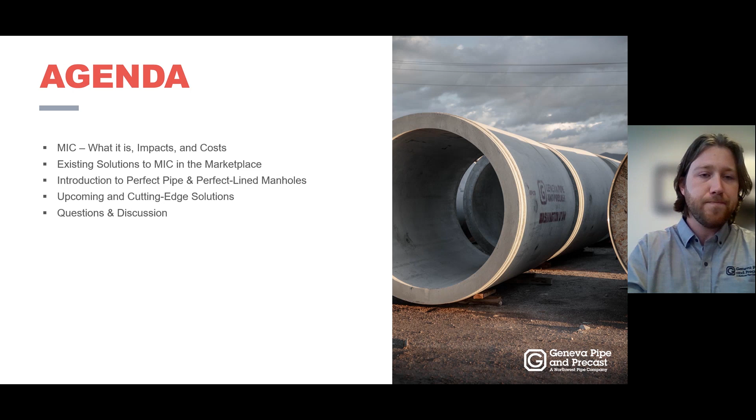So jumping into it now, microbiologically influenced corrosion, also known as MIC, is a major problem in sanitary sewer systems where precast or cast-in-place concrete exists. Usually it flies under the radar, considering that most of this occurs underground, out of sight, in the dark. And so it's a natural reaction of chemical processes.

To a group of employees of a wastewater agency. And in this presentation, which was much like this one, I asked, have you seen any of this corrosion occurring in your system? And they said, no, not at all, regardless of their system being over 80% concrete pipe. Following that meeting, we walked to a manhole that was less than 200 feet away from the meeting room where we had that presentation, and we popped this manhole cover.

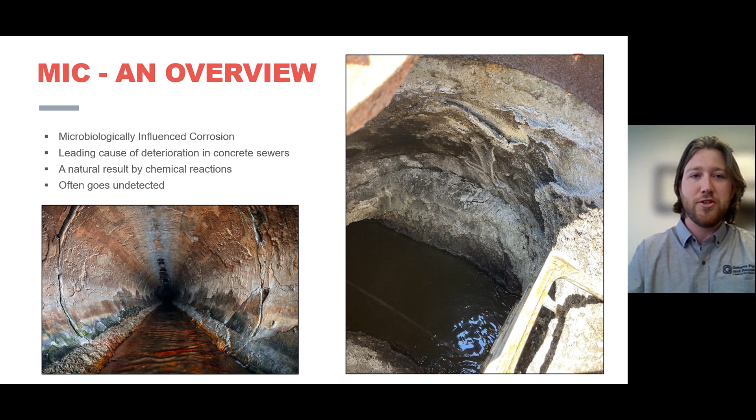Whereas you can see the concrete is peeling away from the walls, this is very much a problem in our area and in our industry, as shown in that one experience.

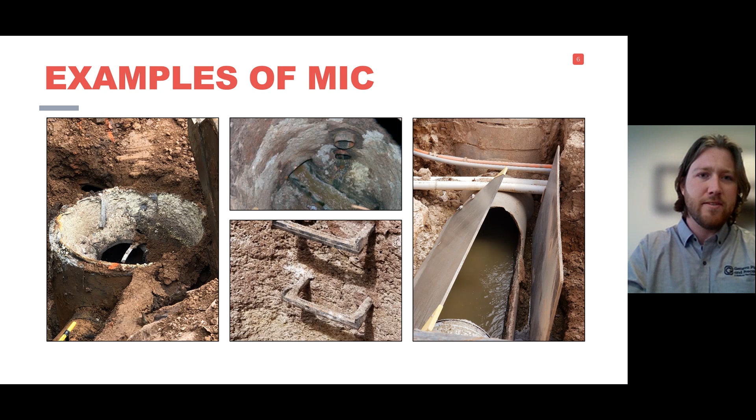So a little bit about the how of MIC, and how does this happen? Where does this corrosion come from? As wastewater is conveyed, there's obviously organic and biological matter that continues to break down as it's transmitted through the system. As this happens, the chemical reactions related to this degradation create H2S, or hydrogen sulfide. As various factors affect the water, it will produce an airborne version of this gas, which will then eat away at the concrete.

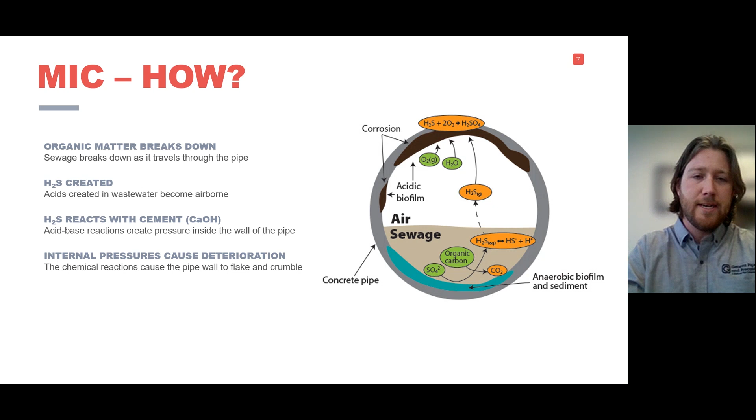It will react with the chemicals inherent to concrete pipe or concrete precast structures, and with expansive internal reactions happening layer by layer, the concrete can slough off and fade away, leaving a shell of what once was, or just failing infrastructure in general.

So there are various factors that increase the likelihood of MIC affecting a specific pipe or structure. First of all, heat is a major factor, so in the southern parts of the US there's a higher likelihood of MIC being a major problem. Turbulence is another, for example lift stations, drop manholes, even steep changes of grade across a manhole.

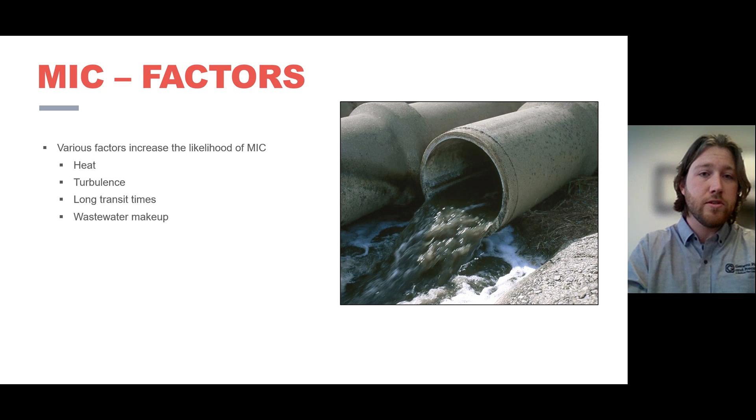Long transit time - the longer that wastewater has to move down the pipe and that matter has to break down, the more acid you're going to see. And finally, wastewater makeup. One example: we had a customer ordering pipe for a dairy, and the temperature of the water combined with the components of the wastewater meant they were eating through concrete pipe very quickly, so they needed alternative solutions to maintain their infrastructure.

Though it might not seem apparent, there are many impacts of what MIC does to us. The first, which we've already talked about a little, is infrastructure reliability - you can have pipes collapsing, manholes failing, and if a manhole's failing, you've got increased I&I.

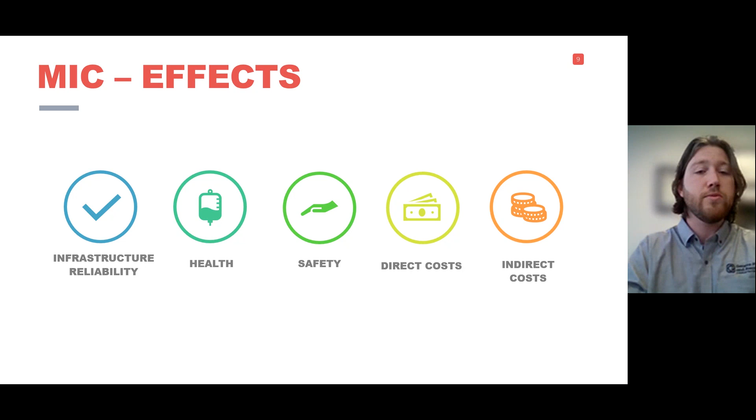You've got the possibility of sinkholes. There's public health concerns, because if your wastewater is leaking into the groundwater, there's obvious impacts there. Safety, direct costs, and indirect costs, which we will talk more about as we move on.

These costs are not insignificant, and we'll talk more about this in just a moment following a poll question. But these include, as I said, infiltration and inflow, the increase in water that needs to be treated, or even worse, exfiltration as it leaks into the soil, rehab, replacement, reduced service life, and finally risk of collapse.

And as you can see from that quote there, it has been one of the most serious and costly problems facing global sewer systems. It is a major problem that we are facing as an industry.

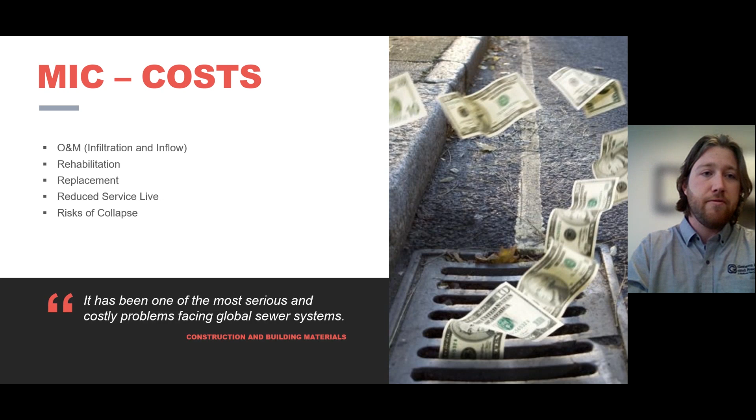So, like I mentioned, here's our first quiz question. Once we get that launched, you should see a quiz pop up in the middle of your screen. Let that load, and here's the first question: how much money would you guess is spent on rehab and replacement each year? You have your options there to go ahead and vote, and once we have a significant number of votes in, we'll take a look at the results.

Alright, so it looks like we have 23 attendees at the moment, and we've got 13 responses. I'll give about another 10 seconds for a response.

And again, you're not being judged on this - we're not recording who's voting what. This is more for us to gauge interest in, and gauge knowledge of, this problem and these solutions in our industry. So with that, it looks like the majority of people voted D, 14 billion, followed by 6 billion and 10 billion. The lowest option was 4 billion dollars, and that is still a massively significant number, considering how much good that money could be doing if this wasn't a problem facing our industry - instead of just replacing products, it could go toward greater service life, greater condition, and so on.

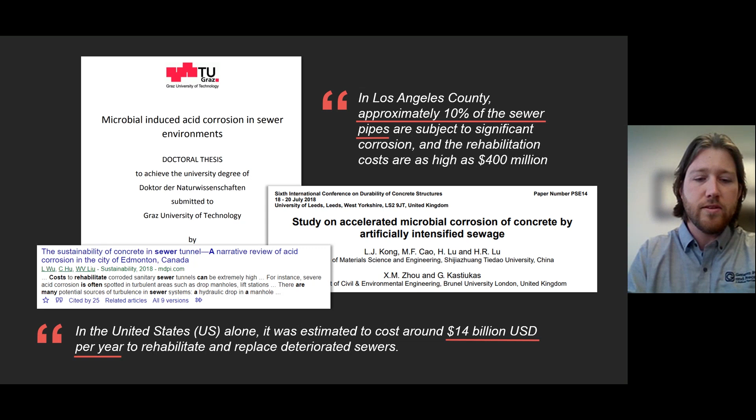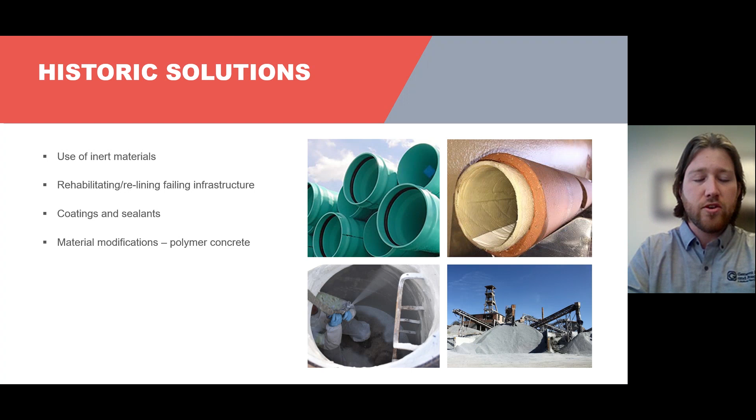If it's been such a shocking, massive, widespread problem, and it's not new or catching anybody by surprise, there have been attempts for quite a while to remedy this. Historically, there have been several options: the first and most common today is the use of inert materials. Second, and far less ideal, is the rehabilitation of failing infrastructure through relining or various other options. Another would be coatings and sealants. And finally, modifying concrete makeup and batch mixes to create a modified or improved solution to a product that is well trusted and has a great reputation in our industry.

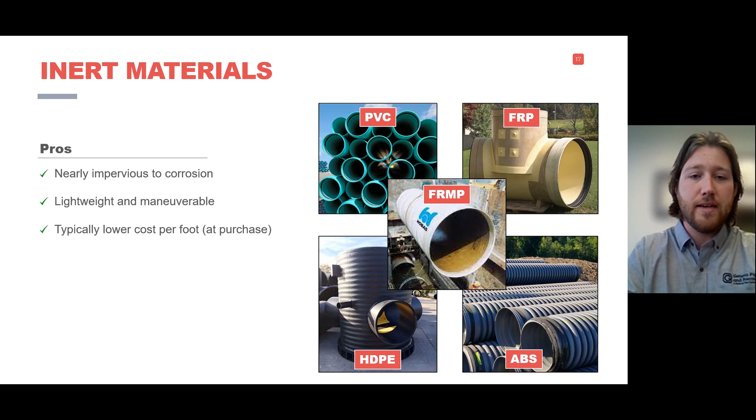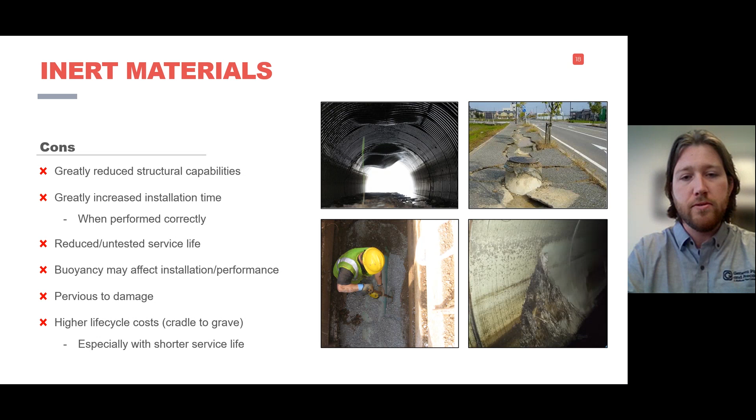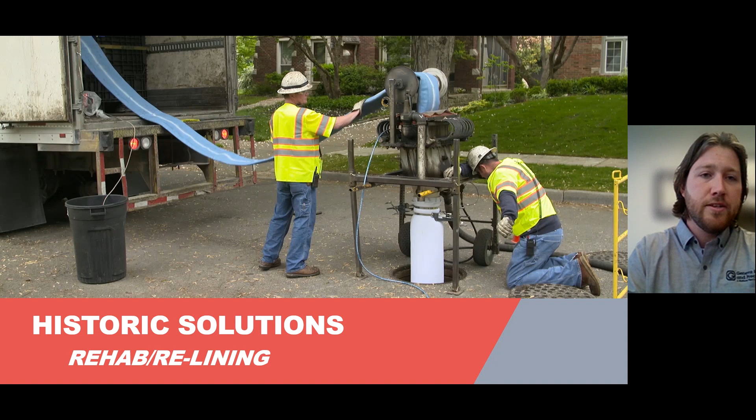The next one, which we're covering briefly, is rehab and relining, which most people in attendance today seem to consider the preferred solution. There are pros and cons. The number one pro is that there's no replacement necessary, which saves time and money, and it's less disruptive.

Finally, one thing I found interesting in my research was that some technology touted as a solution with long-lasting lifespans has not actually existed for its advertised lifespan. So that's something to keep in mind as well.

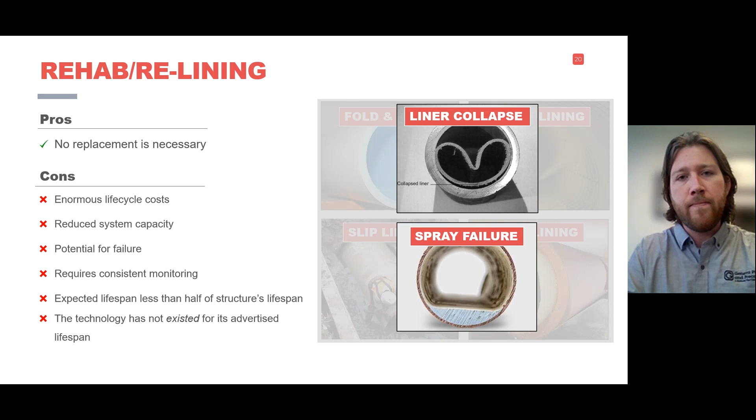Third, we've got coatings and sealants. The pros of these—and I'm not saying these solutions don't have their place—is that these coatings and sealants are designed to protect typically structural materials, precast concrete structures. They can be checked for imperfections, and their thicknesses are adjustable. So if your agency wants greater thickness to ensure corrosion resistance, that's an option, with several options to choose from.

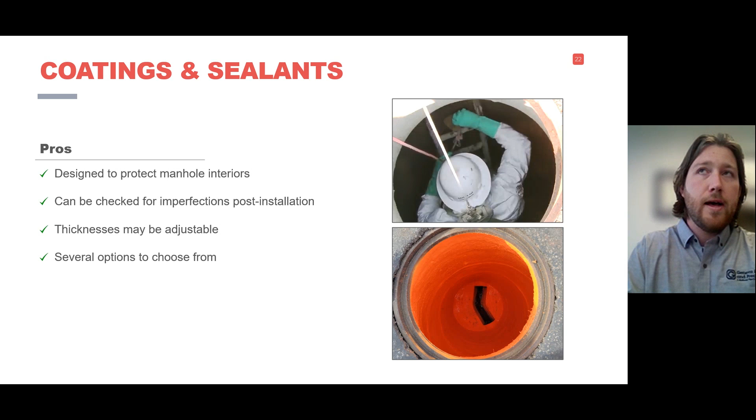But the downside is that this is typically most effective for new installation. As a rehab technique, it's typically not advised without extensive work of sandblasting and cleaning. Because of that, the time and effort involved, in tandem with cost, increases the life cycle cost exponentially.

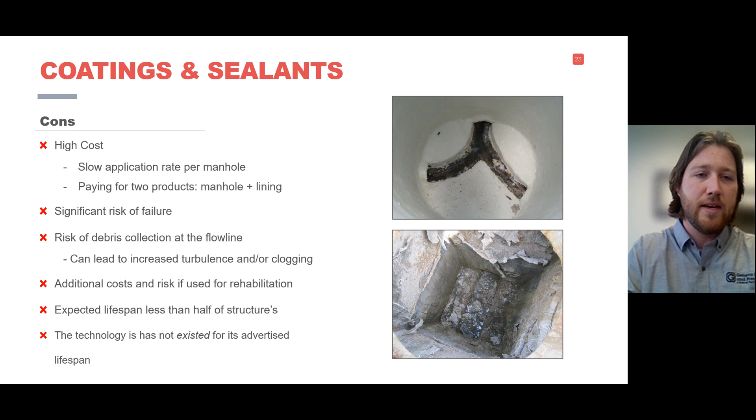It's high cost, it's slow, and there are significant risks of failure and delamination. There are some pretty bad horror stories about things just falling apart, because an agency sealed it and thought they were good to go—they didn't check back. When they did, major damage had taken hold once the liner had started to fail.

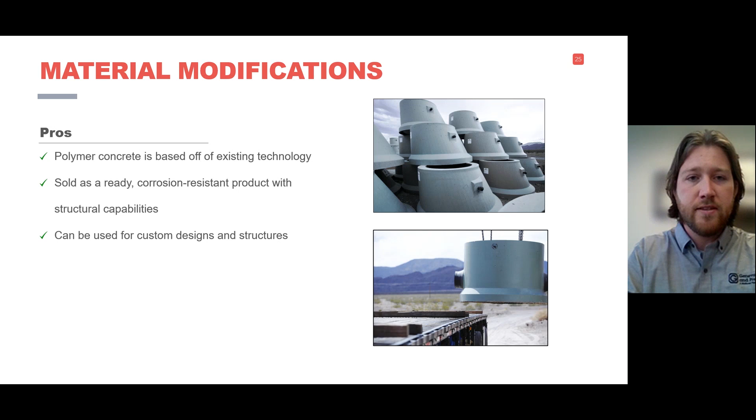Finally, we've got material modifications, typically in the form of polymer concrete. The pros of this are that it's based off existing technology—concrete, precast concrete structures, and things of that nature. It's sold as a ready, corrosion-resistant product, drop in place, typically with the same installation procedures as standard concrete precast structures, and can be used for custom designs, vaults, or things of that nature.

The downside is that it's typically not designed with reinforcement, and additional admixtures and modifications make these materials brittle or subject to various other problems that unmodified concrete doesn't see. There are, based on the minimum thicknesses when using reinforcement, typically not as fragile structures as you see with polymer concrete, just based on standard thicknesses and compressive strengths.

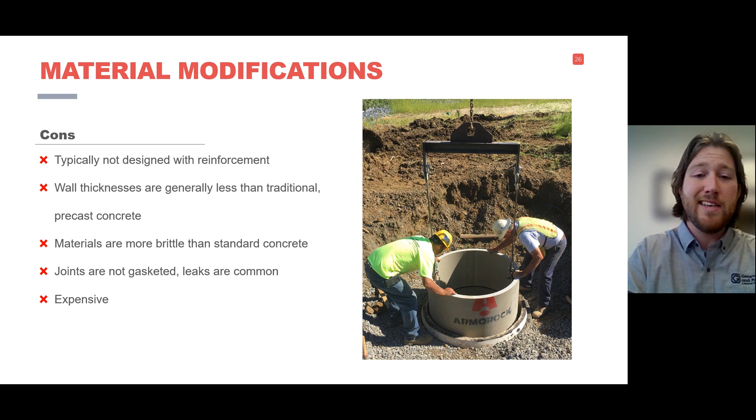Finally, because these joints are not gasketed, leaks are common. So while you might think you're protecting groundwater or things like that, you could actually very well be experiencing exfiltration unknowingly. Finally, it is a pretty expensive option.

So let's get into what could be a perfect solution. The best parts of several of the options we've discussed are that inert materials are inert, and their weaknesses are in their structural capabilities. There was a plan many years ago to develop a hybrid of sorts—a lined concrete pipe—which both prevented the concrete from experiencing corrosion associated with hydrogen sulfide gas, while also providing the strength and structure of concrete pipe as trusted.

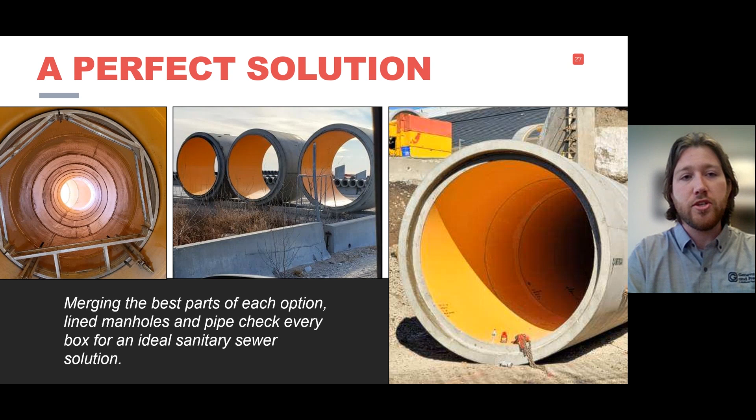So back in about the 1980s, this product entered the market, but there were downsides to it because it required in-field welding, manual entry and access. It was slow, time-consuming, expensive, and absolutely infeasible at smaller diameters, which kind of led us into the product we would like to introduce to you today.

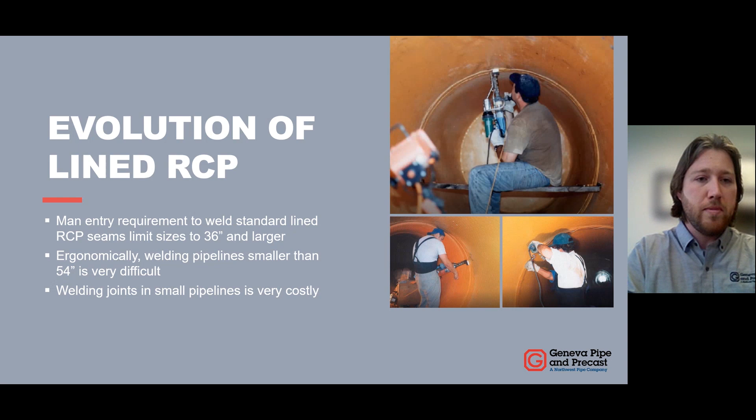And I'm going to be introducing our products, talking a little bit more about the application, how we make it, and the quality of the product.

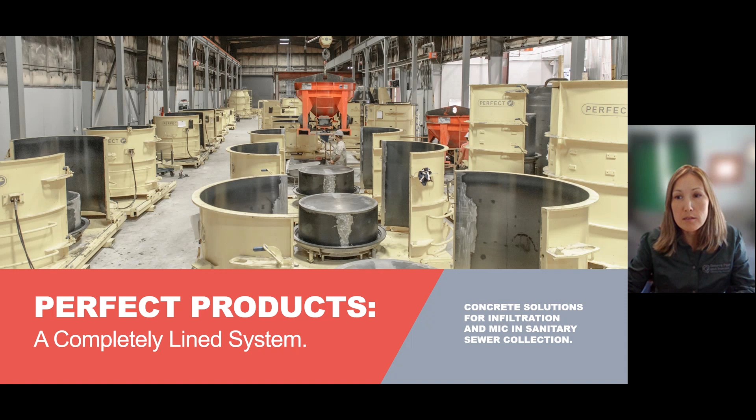So this picture that you're seeing here is a photo of our perfect plants. As you can see, we have various sizes on site that we use to make our lined products, and I'm talking about both lined manholes and lined pipes.

So the entire Perfect Lined system consists of a Perfect Pipe and Perfect Lined manhole. The Perfect Pipe is basically your traditional ASTM C76 RCP, but it's also lined, and it also has innovative connectors that we haven't seen in the US market before. Geneva Pipe was part of the solution and brought this technology over to the US.

The availability of these pipes is anywhere from 24-inch all the way to 120-inch, dictated by the availability of the manufacturing equipment. The pipes are a little bit longer than traditional storm pipes, about 10 feet long. As you get closer to the manhole and need to adjust the length, instead of cutting it in the field, we can manufacture shorter sections so you don't have to cut, and you can still reuse this coupler.

You can see the black coupler on the screen, so you can seamlessly connect pipe to the manhole. These pipes work not just with Perfect Lined manholes, but can connect to any existing or new manhole in the field using the connectors. If somebody's manufacturing a manhole, we would provide the connectors so they can cast them into the manhole, so our Perfect Lined pipe can connect to that manhole.

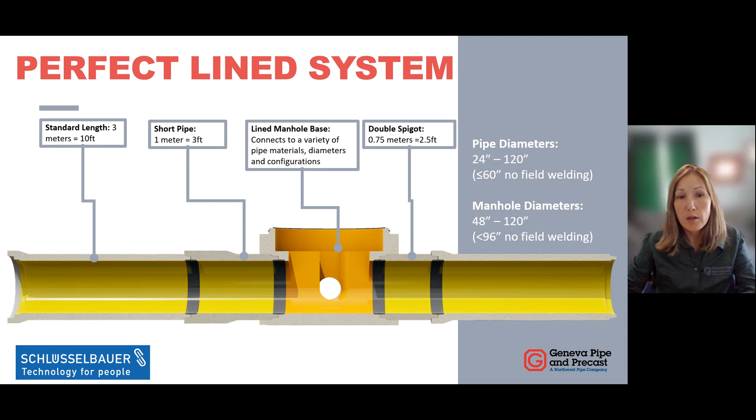Let's look at the anatomy of the Perfect Pipe. It consists of the traditional ASTM C76 RCP plus an embedded liner, showing monolithic or composite action. So it has the strength of the pipe and the corrosion resistance of the HDPE liner, one of the top materials for corrosion resistance, and it's also abrasion resistant.

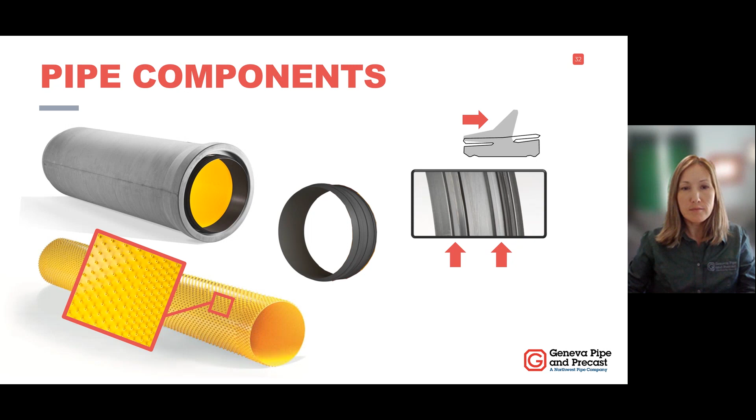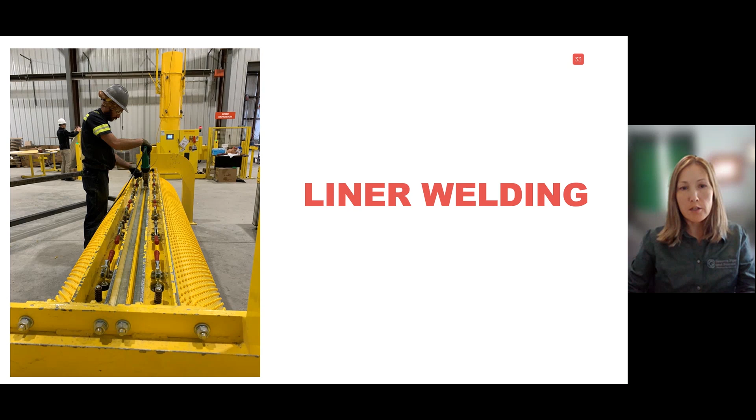Here's a photo of our facility. Each liner goes through the welding with a gun, and then each weld, before we put it into the form to pour with concrete, is tested for any defects. And at that point, no liner would go into casting without being checked. So we have a very tedious process of quality control for our pipes, including the measurements of the liner and the weld checking. And after that, it gets cast into concrete.

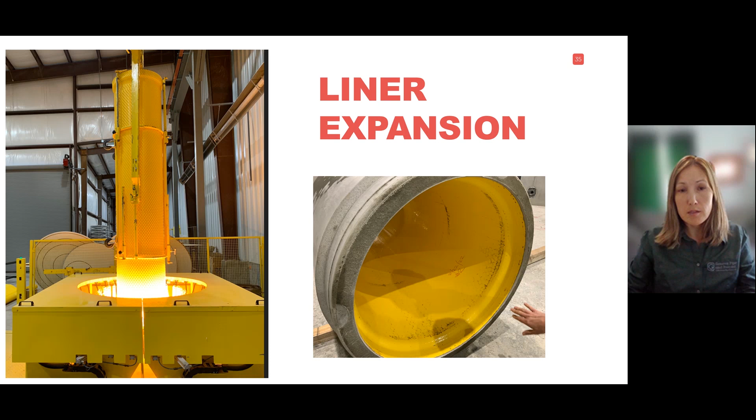So this is the photo of the guy testing the liner. Then the liner goes on the expansion machine. It heats up the liner and expands the ends of the bell and the spigot. So this is the recess point where your black coupler would go as a part of the joint. So for these pipes, you don't really need to do any welding when you install. So that saves on time and installation cost for the agency, for the contractor.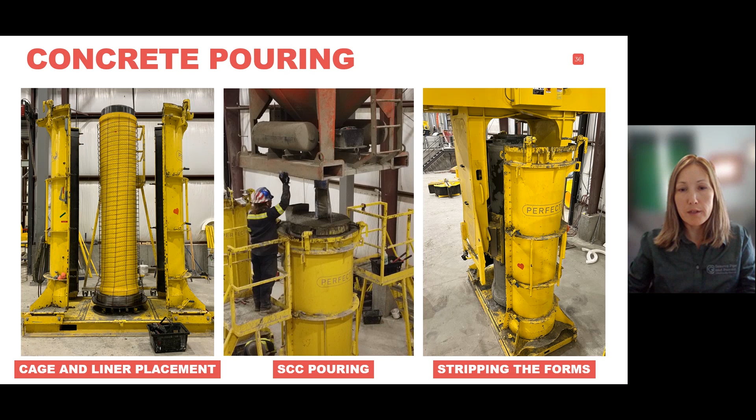And here are the images of how we prepare the liner and the cage right before it's being poured. On the left-hand side, right over the liner, we'll put the reinforcements. And once the reinforcement is in, we do the quality checks to make sure reinforcement is in place, it covers all the joints, and spacing is correct. So then we close it off and pour concrete. And the next day we strip the pipe and do the quality checks to measure everything else that is needed.

So the major benefits: you're getting the strength and structure of concrete, right? And everybody's familiar. The expected service life of concrete is over 100 years. Plus, now the concrete is chemically resistant because of the liner embedded into concrete. Then superior joint performance. The major concern with the agencies in the past related to RCP is the joints. Joints don't perform, they leak, they move. So this pipe resolves all the issues that regular RCP has for leaking or having to weld the HDPE liner.

It is familiar to the contractors. Contractors may have never seen the perfect pipe. However, they've seen RCP, and this pipe is installed just like RCP because it is RCP. And the major advantage of these pipes, it eliminates the field welding for most diameters, right? So if you have a pipe of 24 or 36, even 42 inches, it's really difficult for a human to go in the pipe and access and weld. So the contractor will have to have somebody tiny and experienced. But with these pipes, you don't need to go inside the pipe, and it also eliminates the risk associated with confined spaces. So it's a huge advantage in cost and time and risks of installation.

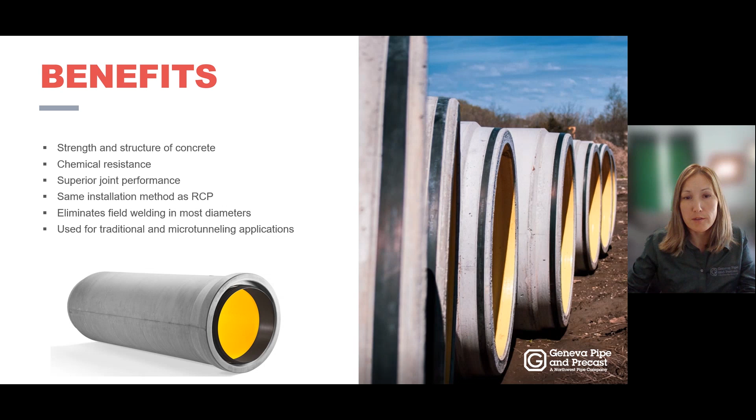Now let's talk about perfect line manholes. So these are the photos of the perfect line manhole and the form that the perfect line manhole is made with. So the background: this technology was developed again in Europe by a guy called Manfred Predl. He's in Germany. And these manholes spread like fire in Europe. They've gotten adopted by the agencies because the agencies saw the value, and they started replacing all the older manholes with lined bases, lined risers, basically perfect line manholes. Over 200,000 lined bases have been installed in North America alone. I'm counting Canada and US.

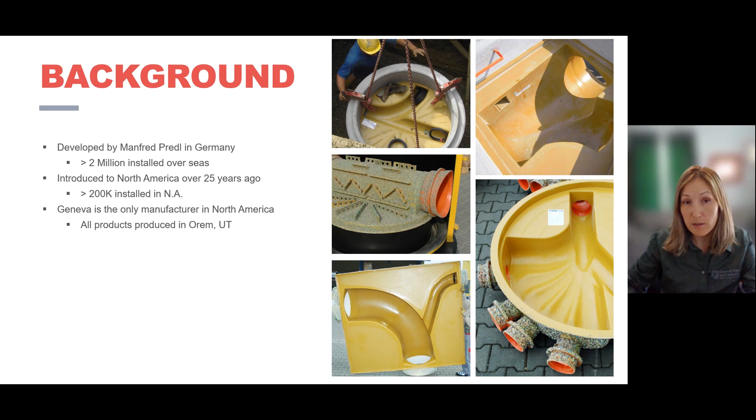And Geneva is the only manufacturer at the moment that produces perfect line manholes. That means the full solution: the bases lined, the risers lined, and the lids lined, and it has seamless joints where you don't have to weld the liner between the sections. It has a gasketed joint, and the manhole has been pressure tested to make sure it is leak proof. So here's a breakdown of all the benefits of the perfect line manhole. We also have a warranty of 50 years against corrosion in these structures.

So as you can see, the base is lined, but it's lined with FRP, or fiber reinforced polymer. It is not easy to line the complex configuration of the base because you have all these turns and troughs and channels, and so we line it with FRP. And then we have risers that are lined with HDPE. You saw in the previous picture when I was talking about the pipe, it's lined with a perfect liner, HDPE liner. We have lots of anchors in it. It's also embedded into the walls of the manholes.

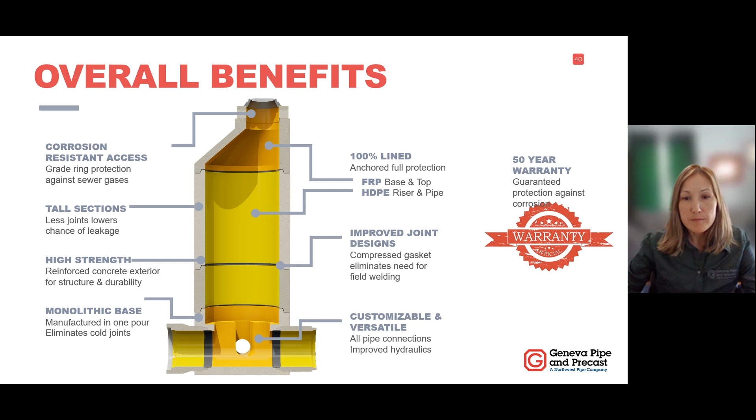So the manhole joints have a compression rubber gasket seal. So when the contractor puts the gasket on and puts the next section on, it compresses and distributes the load of the section evenly, so you have a nice tight seal in that manhole. This manhole is also cast monolithically, so you're not going to have any cracking in between the walls and the bottom slab. And it's cast with a self-consolidating concrete.

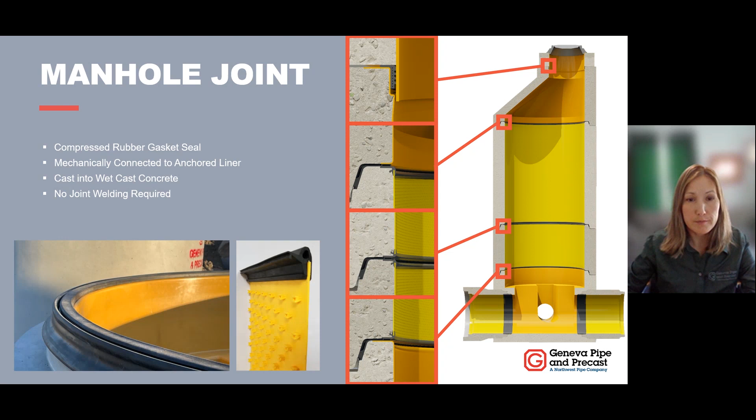And again, the huge advantage is that no welding is required, so you don't need to have anybody inside when you install these structures. You just put the sections like a regular manhole and you'll be done. Again, the same liner as we use for perfect pipe. It's a highly abrasion resistant liner. We have it in different thicknesses. Our perfect line manholes are manufactured with a 2 millimeter thickness. However, if you require higher back pressure, for example a deep installation with high groundwater, we can manufacture it with a 3 millimeter or thicker liner.

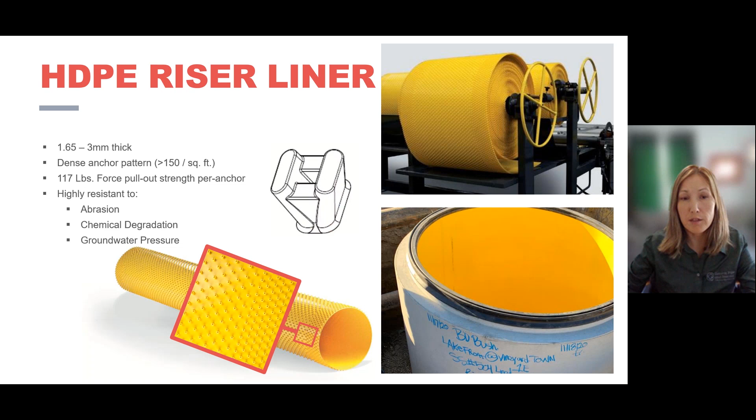Over here, you see how we make the liner. Basically, we make a negative mold of the channel, and then spray it with fiber reinforced polymer or plastic, and then we attach these black little parts. They're called bonding bridges. We attach them to the liner, and then they're going to be cast and hold that liner embedded into concrete. The liner also features built-in connectors for different types of pipe. So if you have specific pipe, let's say SDR35 or DIP, we have specific connectors that can fit that pipe. The photo on the right is one of our first projects, which was made in Utah.

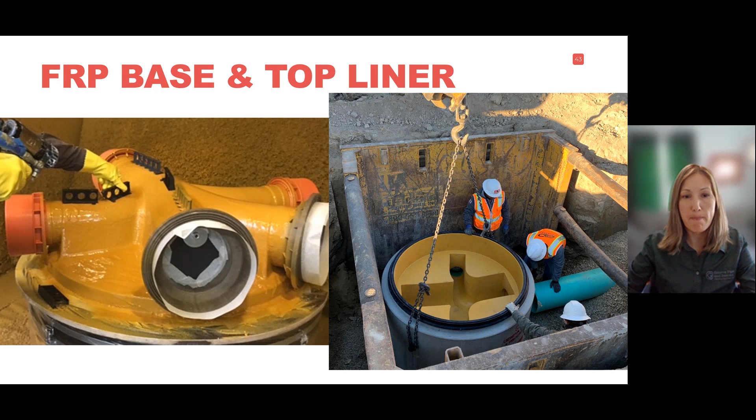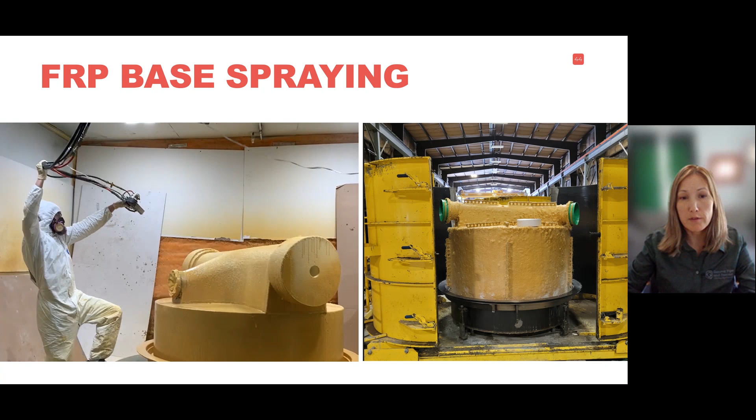So another image showing how we manufacture those liners. Basically we spray the negative mold with the FRP. Once that mold is completed, we place it in a form, then we close it off and pour concrete over. Then we flip it and your base is ready. With these manholes, we can do technically any configuration. We have a robot that cuts the channels or the negative form to any configuration. If you have 3-way, 2-way, 8-inch, 10-inch, we can make it all to whatever your imagination is.

A little bit of testing background. This testing has been done on an existing installation. After 20 years, one of the manholes was dug out. They wanted to see how the liners perform, and if there's any deterioration behind the liner. I don't know if anybody's familiar with T-lock. T-lock used to be one of the popular choices, and it still is, especially in the state of California, where agencies would choose T-lock, and it's a PVC liner. And after some time, 20 years, 35 years, they go back and they do find corrosion behind the liner.

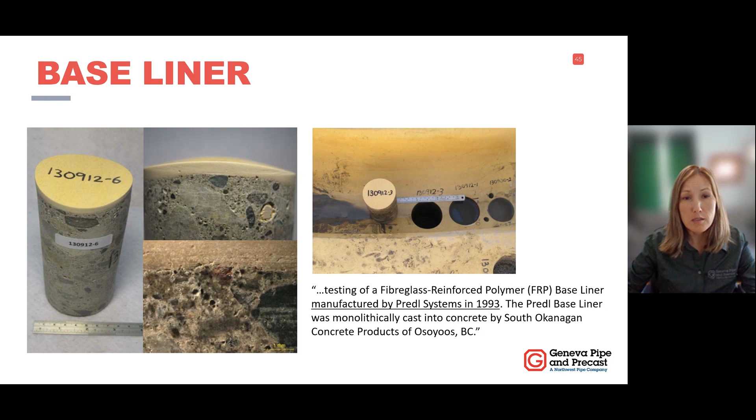The most likely reason is that during the welding, it has not been welded through properly, and you probably had some defects in the welding where your environment could still penetrate through the liner into concrete and create corrosion. But anyway, if you're looking at this cutout, they dug out one of the bases and cored it, and they looked at the thickness before and after, and they did not see any deterioration in the liner, and they did not see any corrosion behind the liner. So this is a great indication that this liner works, and it can seal and protect concrete for years.

And this is to the point where I was saying that we can manufacture any configuration. This is an example of one of the projects that we did last year in Utah, where we had to manufacture a 96-inch lined base. On the left-hand side, this is a liner in the preparation stages, right before being cast. And on the right-hand side, this is the lined base of the manhole. In this case, the agency chose to have only the base lined, but the risers were not lined.

We see that very often. But one thing to remember is that microbial induced corrosion happens in the air, not in the trough zone where you have the flow, but because of the suspended particles from the wastewater. So most likely you're going to have deteriorating walls rather than a deteriorating channel.

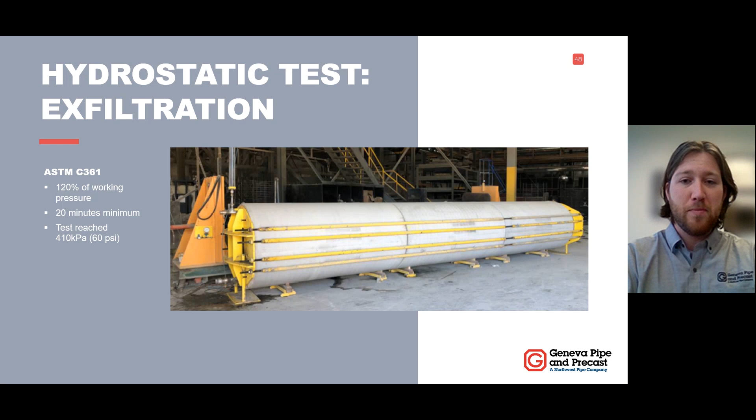Moving on, I wanted to mention some of the tests done for these products. The first was a hydrostatic test for exfiltration. As mentioned earlier, one risk with failing infrastructure is groundwater pollution. If a pipe starts to fail and wastewater gets into the groundwater, there are very serious health concerns. In considering this product that Geneva was willing to put their name and reputation behind, we wanted to make sure these tests would stand up to our industry standards. In this test, we held a positive pressure for 20 minutes at 60 PSI. To be clear, these pipes are not pressure rated, and we are not recommending them for pressure sewer installations. This was simply to see what the product could handle if we get head in a manhole somewhere upstream. It was able to handle 60 PSI, which is a whole lot more head than you'll see in a normal installation or project.

Secondly, we wanted to test for infiltration. Another cost associated with failing infrastructure is the increase of water that needs to be treated. For this test, it's kind of hard to see, but in the right photo we drilled a hole through the bell of one pipe joint and introduced a positive pressure behind the coupler, to test those gaskets and see what they could hold. These held at over 30 PSI for 20 hours, which again is a lot more head than you'll see in most typical installations.

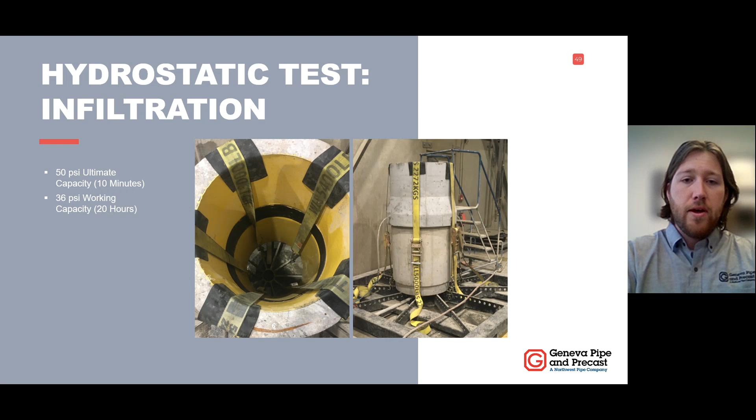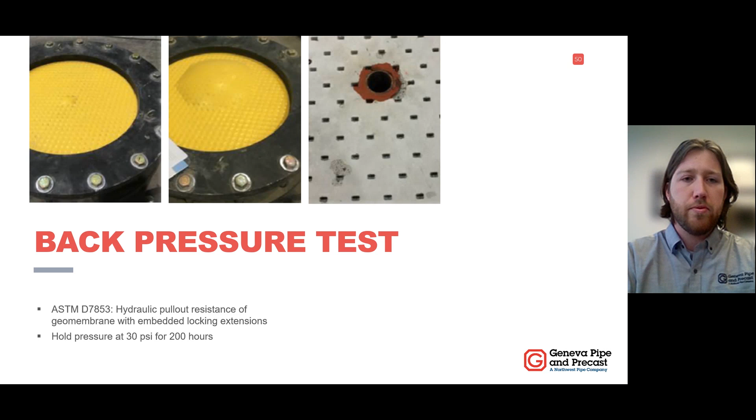Beyond that, we wanted to make sure not just the coupler, but the liner itself, would hold up if water pressure got behind it. I don't remember if Elena specifically mentioned it, but each of those anchors holds, I believe, over 100 pounds of pull-out force per anchor, with over 100 of these little anchors per square foot. So we tested 30 PSI for 200 hours to see how those anchors would perform, and they were able to hold.

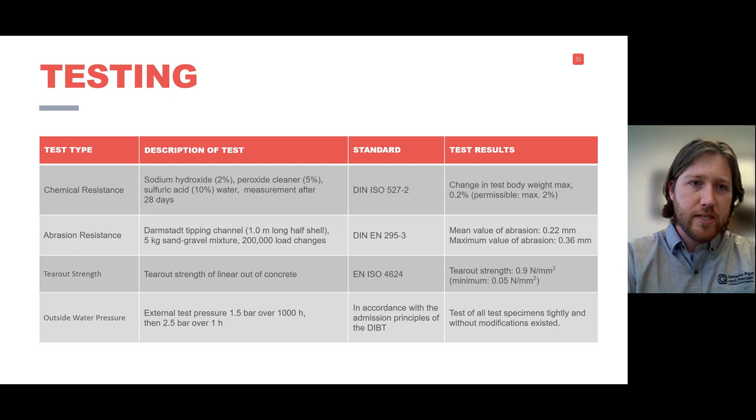As Elena mentioned, this technology was initially developed in Europe, so there have been extensive tests done over decades of service. You don't see ASTM on there for the standards, but these different standard organizations are from the European Committee of Standardization, equivalent to our ASTM standards. They've been tested for chemical resistance, abrasion, tear out strength, outside water pressure, and high pressure jet resistance for when you clean and pressure wash the interior of your system.

Sorry, pipe connection seal, and various other tests.

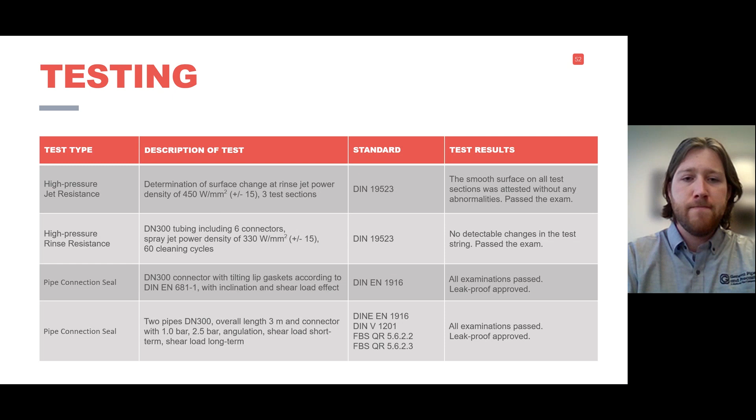Here are some more as well, but let's move on to our final quiz question. If we can launch that. I really wanted to save some time for questions, so I'll try to speed through the rest of my section.

Which of the following is a benefit of perfect pipe and perfect line manholes? Go ahead and submit an answer there, and we'll try to go quick on this one just to save some time.

Alright, we've got 8 responses right now. We still have 30 attendees, so we'll wait a second to get a few more. I like what I'm seeing, a lot of people are getting this question right. I've had more success on this one than some of the others, so good job reading through those options.

Yes, if you haven't already voted, the answer is E, all of the above. All of these various features and benefits of this product line are real and can help prevent your infrastructure from failing prematurely. Thanks for voting for that.

I wanted to highlight just really quickly a couple of projects that we've done in the last year here in Utah, where we're based out of. This one was the 950 North Sewer Trunk Line for a sewer district here in Utah. This one was interesting. There was a major transportation corridor coming in, and the service district knew that if they were to put this pipe in ahead of time, it'd be a lot cheaper to put that in before the highway went in. But they also recognized that if that pipe was ever to fail, it would be enormously expensive to replace or repair or whatever they would need to do.

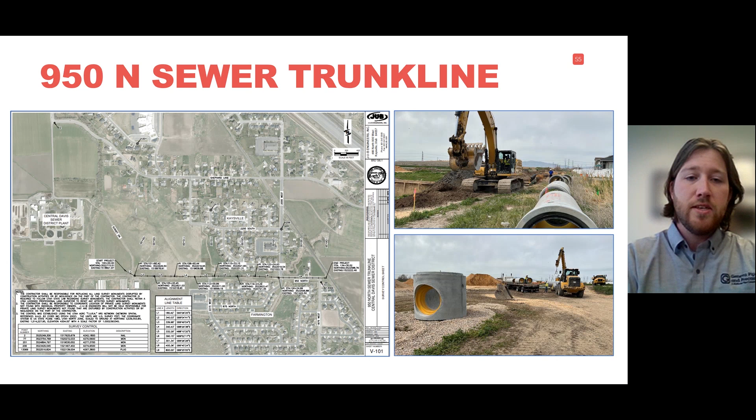The project was bid with 4 different pipe materials: PVC, HDPE lined RCP or perfect pipe, non-lined RCP, and FRP SN72, which some of you may be familiar with. The reason the perfect pipe was chosen for this project was, one, due to its durability. There were great installation depths, over 20 feet, but the real reason why they were so impressed with this product was because of the high groundwater. At that depth, there was groundwater almost to the surface, and they needed something that would be able to resist the infiltration and inflow. So they went with this product for over 3,400 linear feet of sewer pipe.

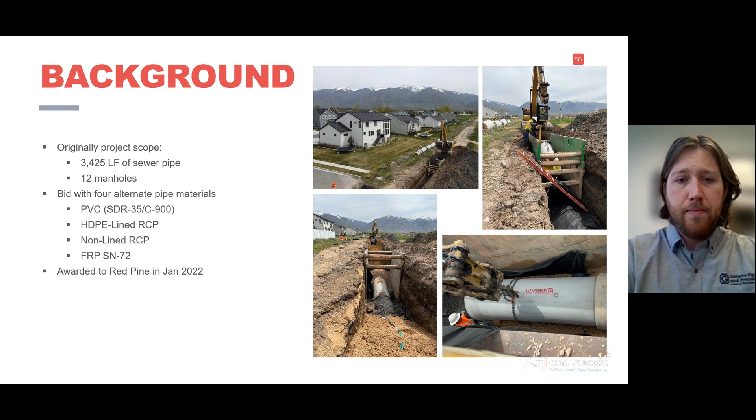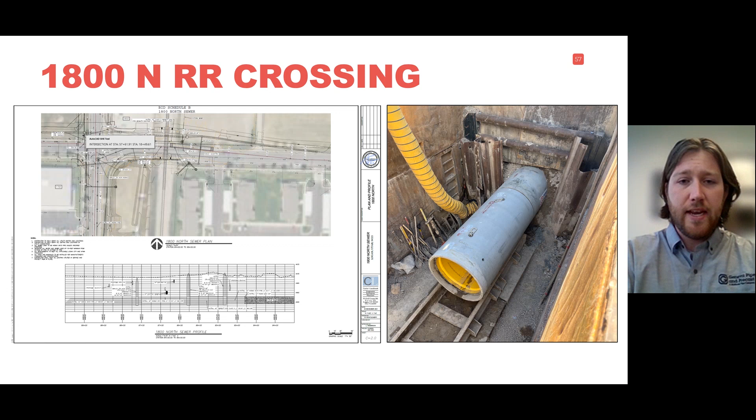The next one I'll briefly cover was a jacking job that we did for the city of Logan that went under UPRR right-of-way. That one was particularly interesting because, as some of you may know, typically if you were going to be crossing railroad right-of-way, you need a casing pipe and then a carrier pipe. For this product, it was approved as an all-in-one solution as both carrier and casing for sewer, which is very unusual. Typically, I'm not aware of any other projects like that, so this was an exciting one for us to do. The background was there's just over 100 feet of sewer pipe from one edge of the right-of-way to the other because the railroad wanted something that would be corrosion resistant and durable.

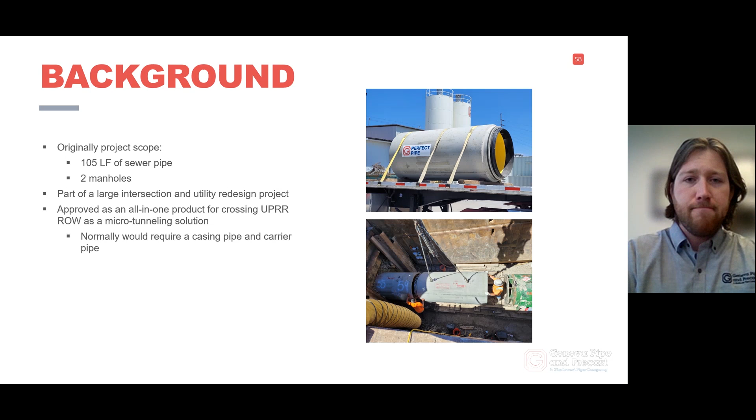A couple of manholes that Elena showed previously. Finally, the benefits of this as a trenchless installation are that, again, you have minimal disruption. You're not tearing up the road. To tear up a railroad crossing would be incredibly problematic and expensive and time consuming, and in reality probably just would never be approved. So this solution was very exciting for us.

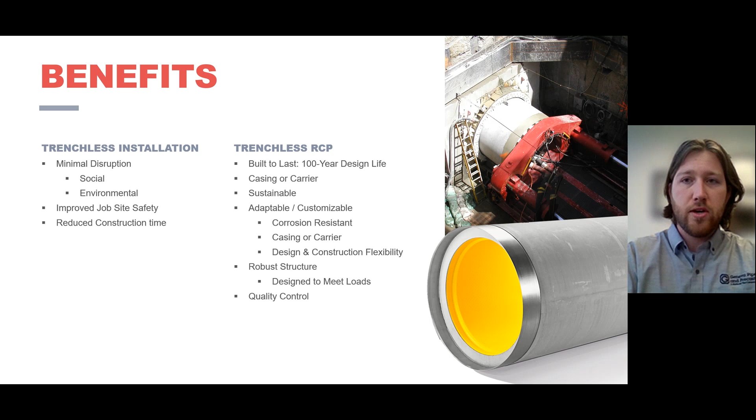I just wanted to briefly tell you that our company is not just producing liner manholes and liner pipe. We also have other solutions suitable for new construction and rehabilitation, and one of them is PVC liner manhole. This is not a liner manhole, but one of the solutions. If you have an existing sewer, we can make the liner and put it on top as a saddle, and put the riser on top of this, so you can have a continuous system without having to cut through or disconnect the pipe. So this could be one of the solutions.

Another one is a PVC manhole. It's almost the same as a liner manhole, it has the basis liner in it, and as a riser we use the PVC. This solution can also be used for rehabilitation work.

So what we would do, many of you indicated that your agency prefers to do rehab work rather than new construction or replacements. So this solution could be suitable for an existing manhole when you want to rehab. We have a scanner that would go inside your existing manhole and scan the geometry with all the imperfections and cavities, and we will determine your existing channel configuration. Based on that, we can make the liner that fits into your existing base, and then the walls of the manhole can be protected with a PVC riser.

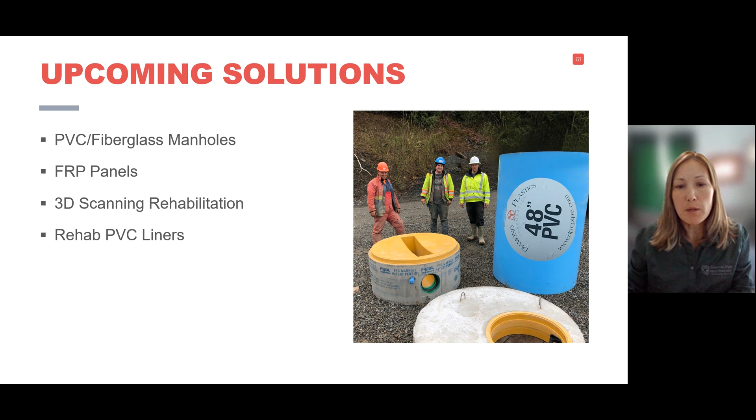This product has been tested and conforms to H20 or HL93 load. It has been used and installed in some agencies throughout the US, but it's still a relatively new product. Here you see an installation of it. Lots of agencies choose to have a pilot installation to see how that works.

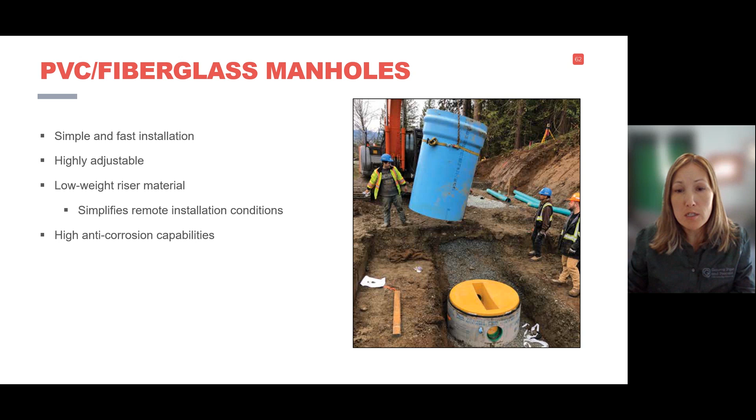Another product of ours is FRP panels, also for rehab work. The same way we would do with the manholes, we scan it with our scanner to determine the exact configuration of your vault, manhole, or box. We can make the FRP panels and assemble them in the field, with seamless connection between the panels, water resistant and corrosion resistant.

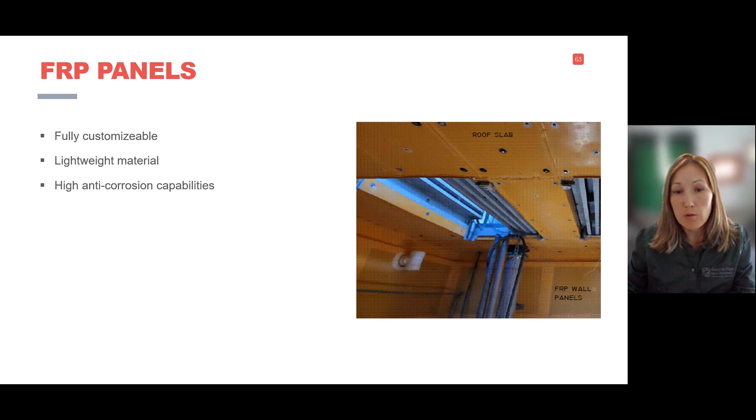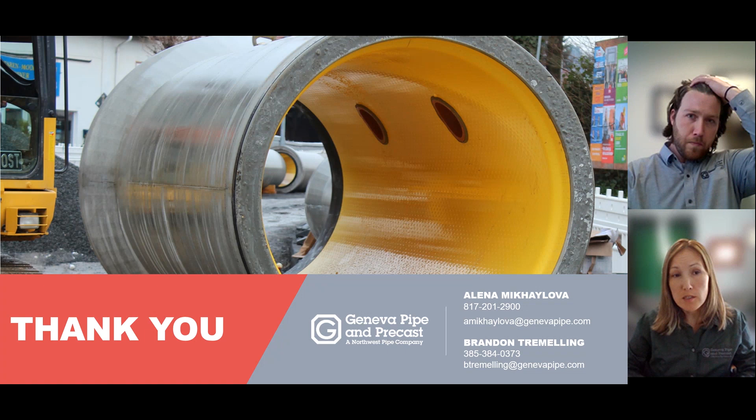Yeah, sure. The lead times for the pipe, I know lots of you have probably experienced long lead times on storm products. Lots of manufacturers have backlogs because of the supply chain issues created over the last couple of years. I wanted to emphasize that our liner products have a separate facility, independent of the stormwater products, so pipes are readily available. If you wanted to specify, we have sizes anywhere between 24 and 60.

The manholes, the lead times right now are anywhere between 4 to 6 weeks, and it depends on the season. If we get into a heavier season, our lead times can get longer; if it's a slower season, our lead times get shorter.